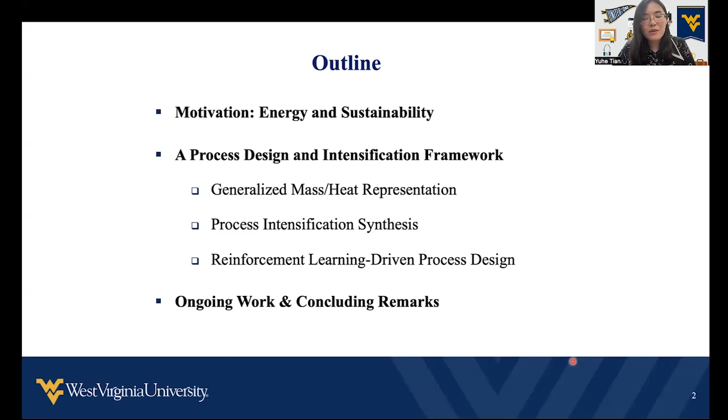Today, I will talk about the synthesis of sustainable process intensification systems. My presentation will be organized in the following way. I will start with the motivation to address the dual challenge of energy and sustainability. I will then introduce our process design and intensification framework, featuring generalized mass heat representation and also synthesis driven by mathematical optimization and more recently through reinforcement learning.

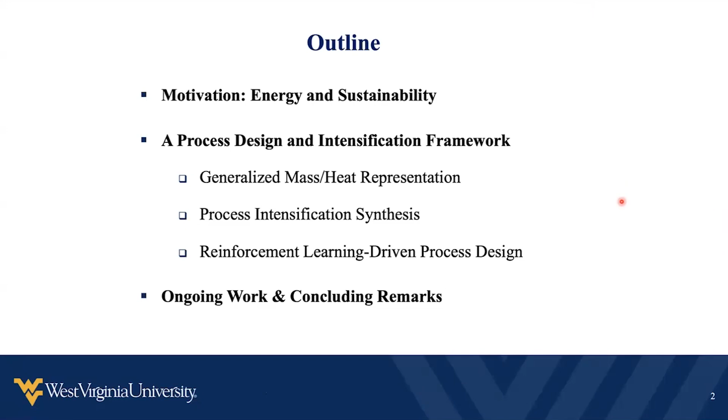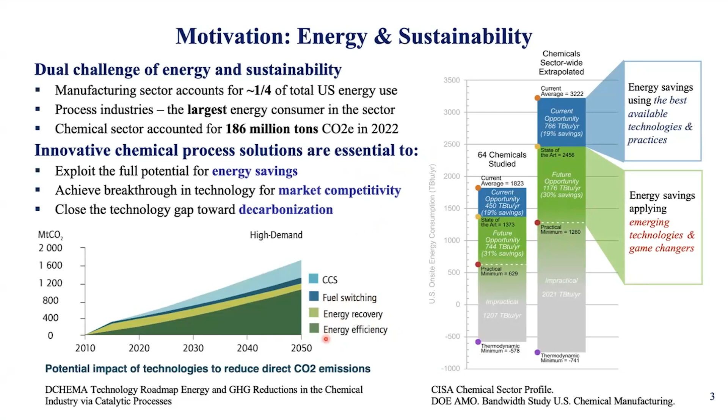To start, as we know, the chemical processing industry is the largest energy consumer in the manufacturing sector. It also accounts for a majority of carbon emissions. As per the DOE bandwidth study, if we implement the best available technologies in the current practice, around 19% of energy savings can be achieved. The development and deployment of emerging technologies or even game-changer techniques offers another 30% of energy savings toward the practical minimum of energy consumption. In this way, the innovation of chemical process solutions is really essential to exploit the full potential for energy savings and also to close the technology gap for energy efficiency towards decarbonization.

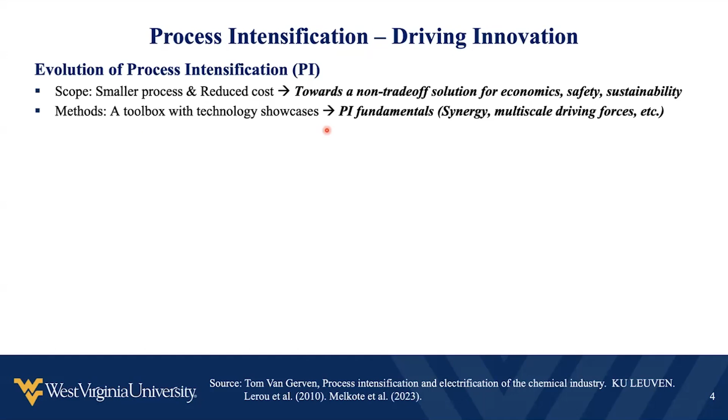Toward this direction, process intensification has been regarded as a promising class of technologies toward the non-trade-off solution from all the aspects of economics, safety, and sustainability. The concept of PI can date back to the 1980s, starting with the development of smaller processes with reduced cost. It has been traditionally regarded as a toolbox with certain technology showcases depending on experimental breakthroughs. However, recent years has witnessed the development of systematic theories on PI fundamentals, such as how to leverage multifunctional synergy, how to enhance multi-scale driving forces, etc.

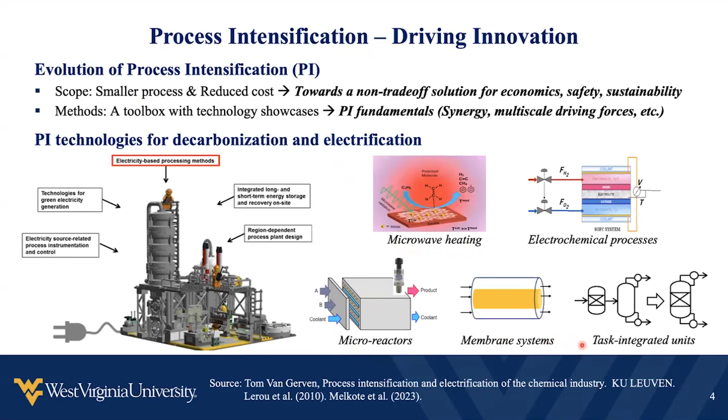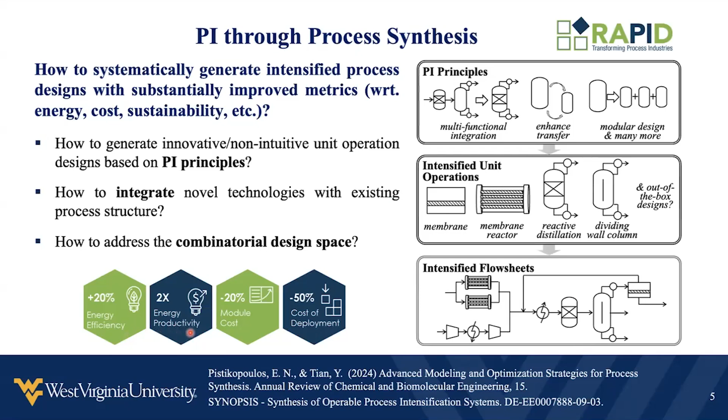Intensified technologies has also been playing a key role for decarbonization and electrification. It can either change the way that we are using energy, such as through microwave heating, electrochemical processes, or lead to the development of novel process units with step change efficiency, such as microreactors, membrane systems, task-integrated units, etc. A key question for computational research is how can we systematically generate intensified process designs based on these fundamental principles? And with the resulting modular or intensified unit operations, how can we integrate them with the existing process structure? And on top of that, how can we achieve substantially improved metrics, such as these defined by the AIChE RAPID Institute, more than 20% improvement on energy efficiency, double energy productivity, etc.

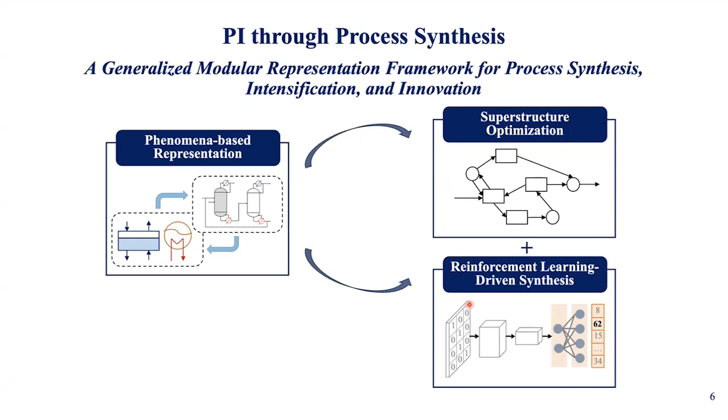To address some of these challenges, we have been developing a generalized modular representation framework for process synthesis, intensification, and innovation. The framework is built on a novel phenomena-based perspective to capture process systems from a lower aggregated level, and using superstructure optimization and reinforcement learning to systematically generate unit operation and flowsheet designs. In this framework, we also explore a little bit the lack of mechanistic model, which is very true for many emerging process systems such as microwave heating. So how can we use experimental data to incorporate these techniques into systems level integration and analysis as soon as possible?

In the following of this presentation, we'll be zooming into each component one by one, and let's start with the phenomena-based representation.

As we know, conventional process synthesis uses unit operations as the elementary building blocks for superstructure representation, and mathematical optimization will identify the optimal selection of these unit operations and also their flowsheet interactions. However, the pre-postulation of which unit operations should be included may sometimes hinder the discovery of non-intuitive or innovative process design solutions. On the other hand, unit operations can be regarded as an aggregation of more fundamental phenomena building blocks, such as reaction, separation, cooling, heating, mixing, splitting, etc. Using these phenomena building blocks to represent the process superstructure may open up the opportunity to identify novel process solutions, including the reinvention of conventional unit operations.

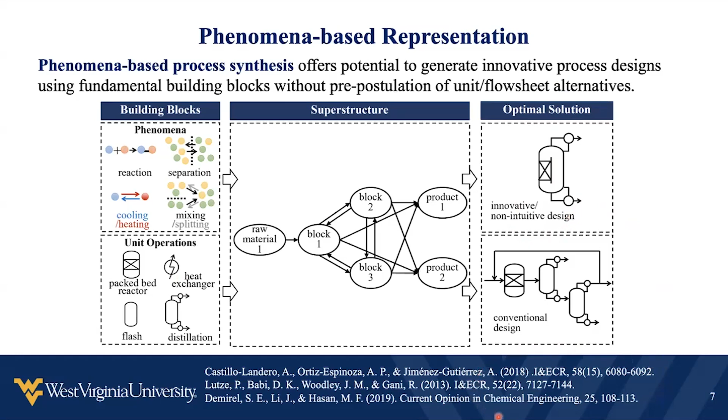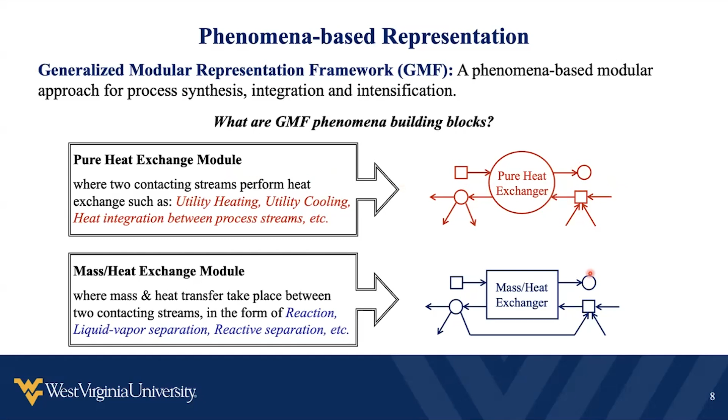Motivated by this, phenomena-based process synthesis has received increasing interest from the community, with some of the pioneering work listed here. Our solution towards phenomena-based synthesis is through the Generalized Modular Representation Framework. GMF utilizes two types of phenomena building blocks: a pure heat exchange module, where the two contacting streams can perform heat exchange, such as heating, cooling, or heat integration, and another mass heat exchange module, where the streams can perform reaction, separation, reactive separation, etc.

The representation hierarchy of GMF thus starts from the compact building blocks. From each building block, diverse process tasks can be identified, and the connection of these process tasks can lead to different unit operation or flowsheet designs. So the key question is lying here.

How can we identify different tasks from the same unified phenomena building block? And what is the key advantage for such compact building block representation? And what are the underlying model formulations to enable this systematic identification?

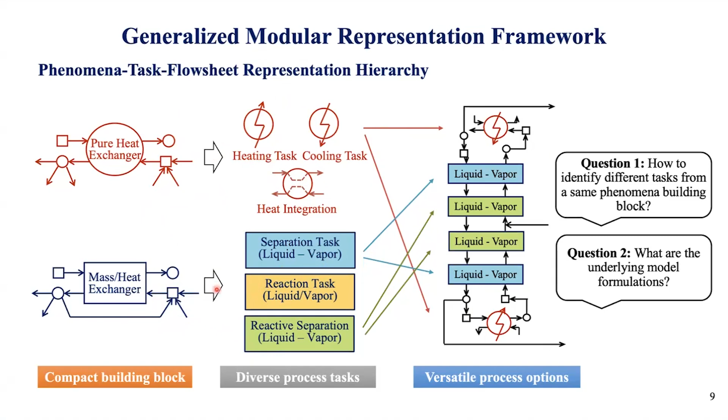Using the mass heat exchange module as an example, our solution is the Gibbs-free energy-based formulation for the driving force constraint. Let's use the example of a liquid vapor system, which may be included in a distillation system.

The starting point of the driving force constraint is the decreasing of the total Gibbs-free energy based on the second law of thermodynamics. To mimic this decreasing trend, please note that we don't enforce any equilibrium, only the decreasing of the Gibbs-free energy.

We use two terms to mimic the decreasing trend as a function of the process variables. The first term, G1, is a function of the change in molar amount in the inlet and outlet streams, and the second term, G2, is the derivative term of the partial total Gibbs-free energy versus the partial molar amount.

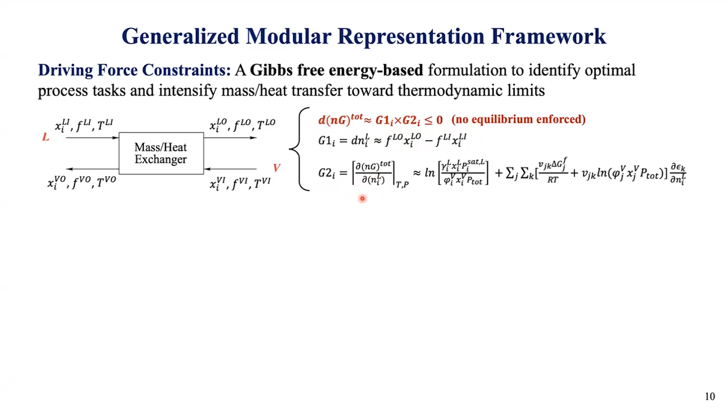What is surprising is that the further expansion of this G2 term comprises two parts. The first part, in the form of the separation constant, is dictating the existence and also the extent of the separation task. The second part is concerning the reaction as a function of the reaction extent.

With this observation, we use auxiliary binary or 0-1 variables to denote the existence or not of the separation task, reaction task, or if they both exist, leading to an intensified reactive separation task.

The key advantage offered by the driving force constraint is to let the mechanism of first principles determine the synergy or not between these multifunctional phenomena such as separation and reaction, and also it contributes to intensifying the mass transfer toward the thermodynamic limits.

At the same time, the representation of the mass heat exchange module remains compact and aggregate for physical representation, and also greatly contributes to keeping a tractable computational load.

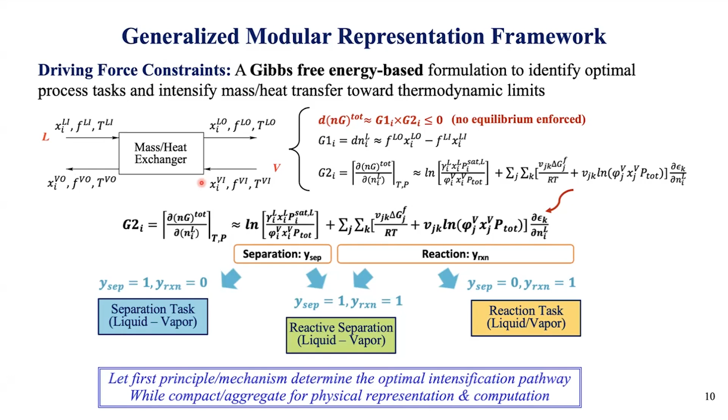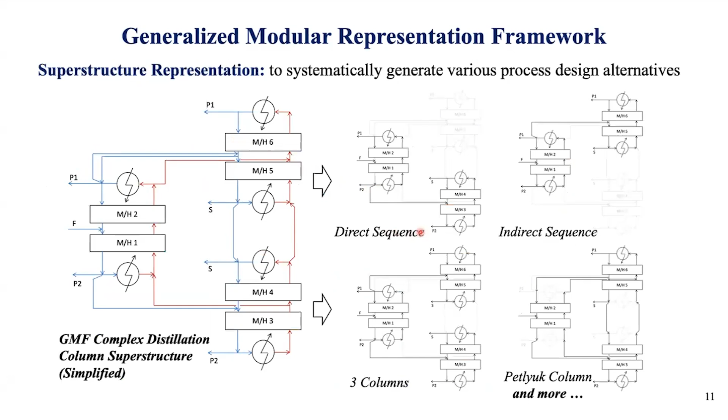With the representation of each phenomena building block, we then formulate a superstructure representation from which different process alternatives from the structural point of view can be generated.

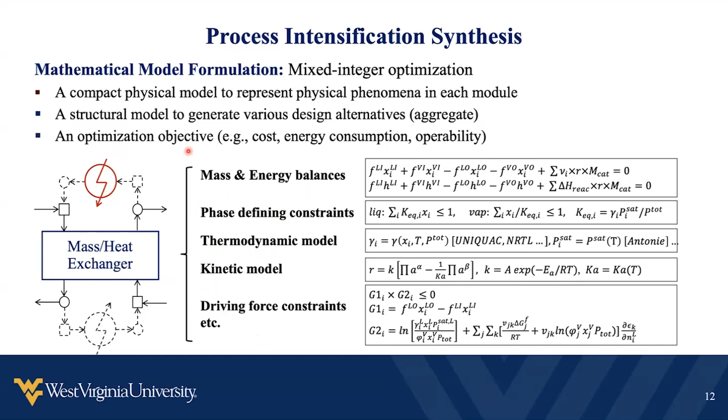The GMF synthesis model is formulated as a mixed-integer nonlinear optimization problem, including the compact physical model, mass-energy balances, phase defining, thermodynamic, kinetic, driving force constraint, etc., to represent the physical phenomena taking place in each of the modules, and then a structural model to generate different design alternatives in an aggregated manner. And on top, an optimization objective, which can be defined against cost, energy consumption, operability, etc.

With the basics of GMF, let's look at how it works to generate different types of intensified systems. We will first look at the combined reaction separation systems, which is a classical application for process intensification. Here, we use olefin metathesis as a representative example to produce butene and hexene from pentene.

Here, we integrate the use of GMF with attainable region theory. We would like not only to identify what is the optimal process design solution, but also how good is the resulting intensified design against these ultimate performance limits set by attainable region.

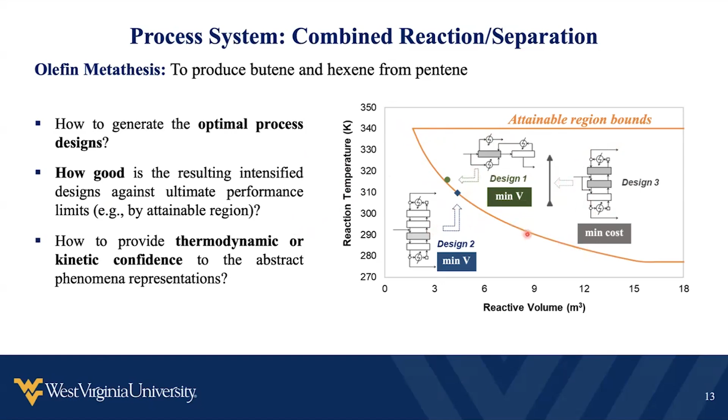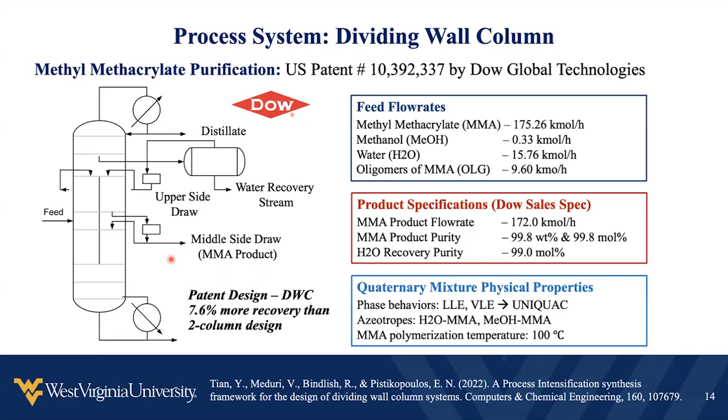We have also performed a collaborative case study with Dow Chemical Company for MMA, methyl methacrylate, purification. In the patent design by Dow Global Technologies, a dividing wall column configuration was proposed, which featured around 7.6% more recovery of the MMA compared to the conventional two column in sequence design.

Using GMF for grassroots design for this MMA purification example, we start with the GMF superstructure representation with the heat and mass heat exchange modules and identify the optimal GMF design solution.

These modular representations will be further validated with unit operation-based design and simulations such as Aspen Plus. GMF has been successful in identifying new precise design solutions featuring the structure of a dividing wall column, decanter, and also a flash column, featuring around 30% utility usage reduction and also around 50% equipment size reduction compared to the state-of-the-art patent design.

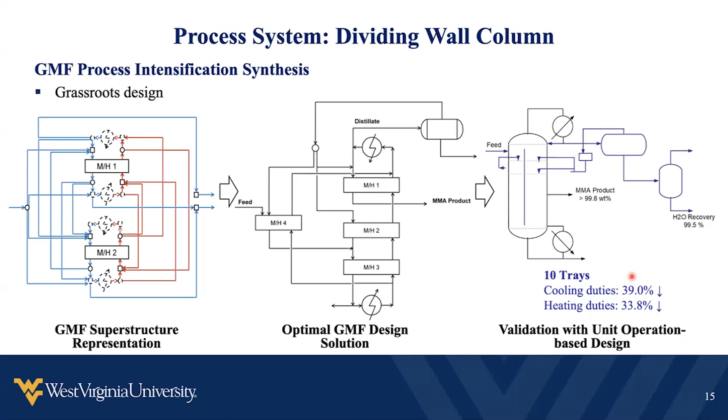We have also applied GMF for retrofit design and also for the synthesis of conventional design solutions to benchmark.

In addition to distillation-based systems, we have also looked into membrane-assisted reaction systems. The first question here is how can we capture the role of membrane?

The answer to this is particularly benefited from the unified Gibbs-free energy change-based driving force constraint, because the feasibility of the mass transfer through the membrane is also governed by the difference of chemical potentials.

Using the driving force constraint and the membrane feasibility constraint, we can systematically identify if there's synergy between membrane separation and reaction or not, thus leading to the identification of an intensified membrane-assisted reaction module or a conventional reaction module, again using the mass heat exchange module as the basic phenomena building block.

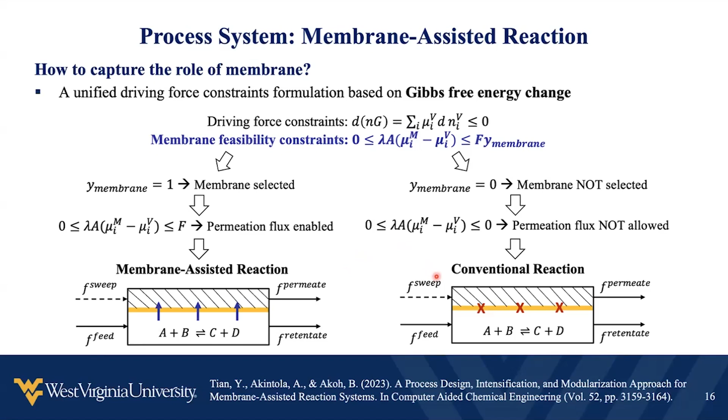To further capture the distributed process systems such as membrane reactor systems, we have proposed the GMF with coupled orthogonal collocation on finite elements.

A key advantage of GMF OCFE is only introducing continuous variables to improve the intra-modeling of the GMF mass heat exchange module, without further increasing the combinatorial or 0-1 mixed integer variables, which would be challenging for the superstructure optimization.

Here we have compared the GMF OCFE representation versus the modules-in-series type of representation mimicking the compartment models, and we have shown the superior modeling performance of the GMF OCFE.

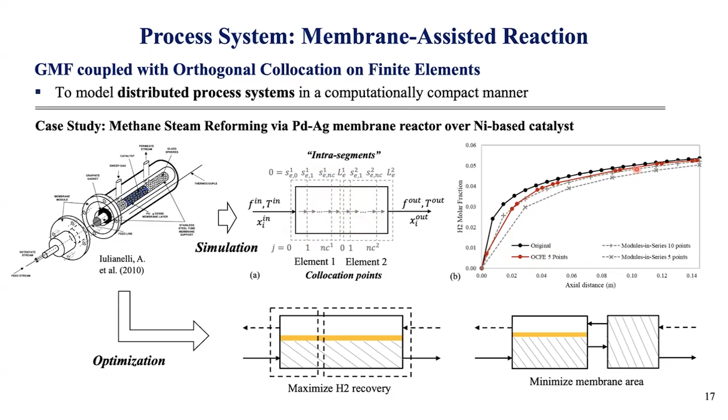We have also investigated the micro-reaction systems, which is the very beginning of the intensification technologies. To capture the role of miniaturization, we ask what is dictating the choice of a conventional larger-scale reaction versus a micro-reaction system. We propose the use of the second Damkohler number, which dictates the relative importance of the reaction rate versus the diffusive mass transfer.

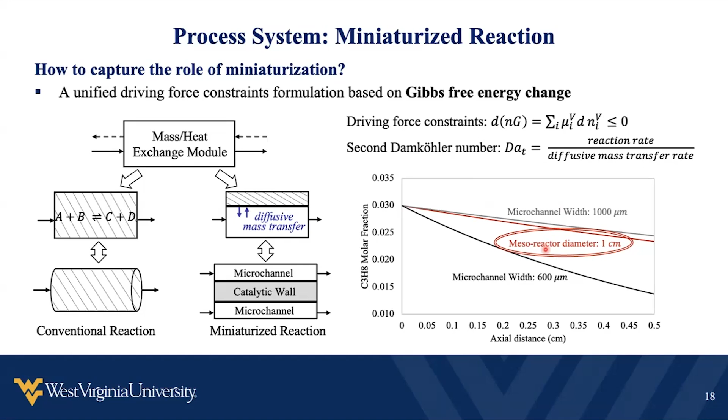The latter becomes significantly more important when the reactor scale is miniaturized. Preliminary results have shown that there may exist boundary conditions below which the micro-channel type of miniaturized reactors may overperform, and above which the micro-channel reactors may perform less well than the mesoscale or conventional scale reactors. The key here is how can we make a systematic decision on the choice of scaling up versus scaling down.

In the previous presentation, we talked about the synthesis and representation capability of different types of modular or intensified systems. Another note we would like to make here is about the integration of design and operability. A key question for intensified systems is that the integration of multiple tasks may reduce the degree of freedom and reduce the operating window of the resulting unit operations. So how can we synthesize optimal intensified designs while also guaranteeing a desired level of operability?

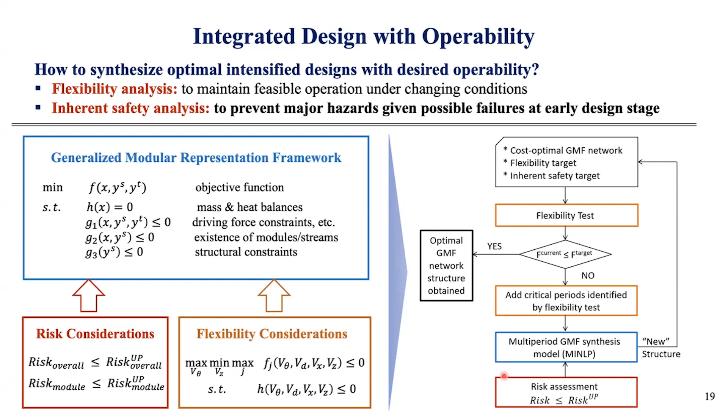In our previous work, we have incorporated flexibility analysis and risk considerations with GMF, which results in an iterative framework to generate optimal GMF designs, but also with desired operability.

An illustrative case study on MTBE production: here we can see that if we implement cost-driven objective functions, we will identify a single column type of structure with 5 mass heat exchange modules.

If we add a further constraint to accommodate uncertainty and increase the feasible operating range by around 10%, while simultaneously reducing the overall process risk for inherent safety considerations, the optimal design will lead to an increased number of modules compared to the cost-optimal one.

If we push further for safety considerations, we observe optimal designs with a side column type of structure. In other words, the inclusion of more degrees of freedom contributes to the enhancement of operability, and of course the price paid is in the cost objective function.

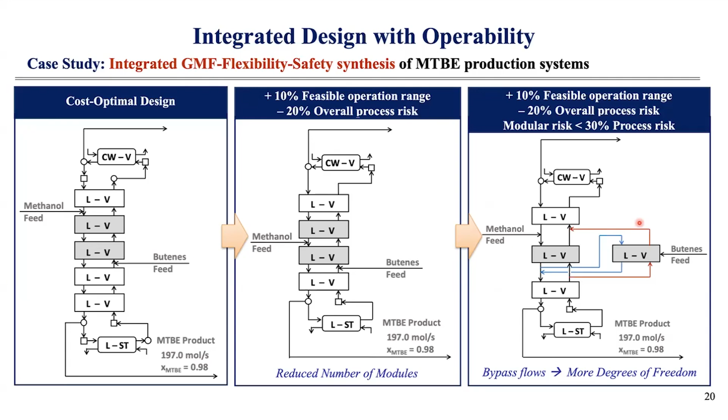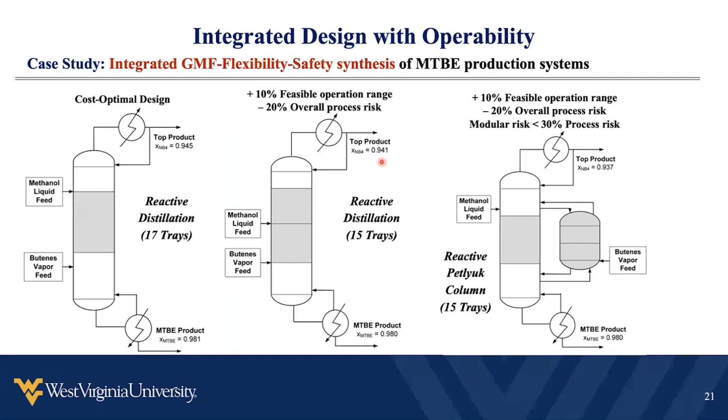For the identification with the corresponding unit operations, we can identify the different corresponding design structures. The key message here is that the incorporation of operability considerations, even at the phenomena design stage, may lead to the discovery of different design structures with notable operational or structural changes.

For more information, we would like to invite you to look into our framework development for the synthesis of operable process intensification systems, which can be referred to in our published work.

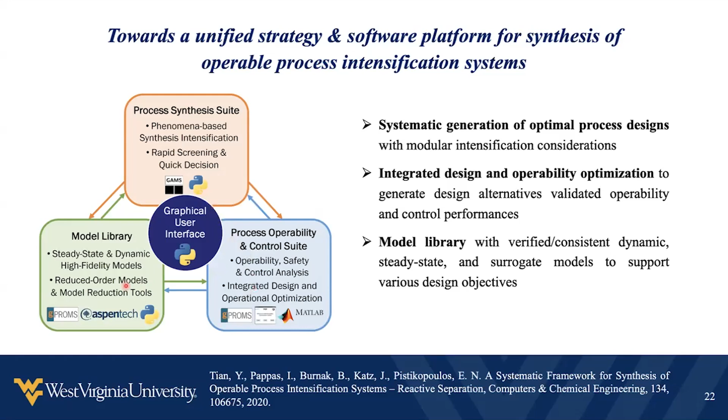In addition to the process synthesis representation and the integration of design operability optimization, the synthesis software platform also features a model library with verified dynamic, steady state, and surrogate models to support different design or operational analysis objectives.

In the previous part of the presentation, we discussed how to leverage phenomena-based representation with superstructure optimization to identify novel intensified design solutions. However, as can be noted, GMF and many general process synthesis problems may lead to large-scale, highly nonlinear, and non-convex optimization problems.

So how can emerging machine learning techniques help us improve the efficiency of synthesis solutions and intelligently generate process designs? In collaboration with Keylogic and PNNL, we have developed an RL-driven process synthesis strategy. More information is included in our FOCAPD conference paper through Systems and Control Transactions.

Herein, the goal is starting from a process unit pool, including the maximum available unit operations such as flash, mixer, reactor, heater, cooler, etc., without any superstructure pre-calculation, using the RL algorithm to identify feasible design solutions and ideally the optimal design solution. I would attribute all the efforts and contributions to my collaborators, and now just a very brief overview of the algorithm.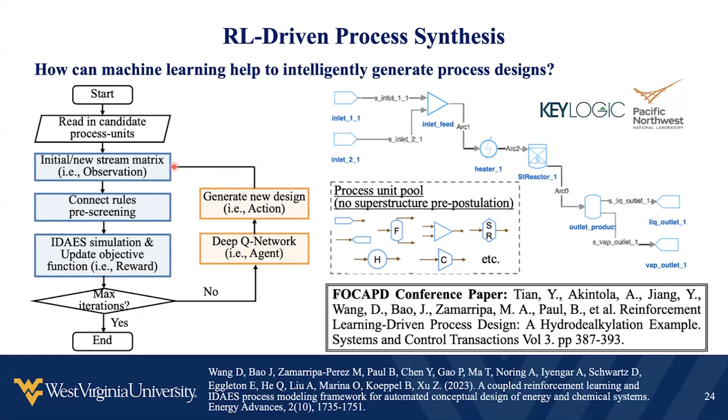The agent is designed using the DeepQ network, and it will determine the action to generate a new design, such as adding a new unit operation or changing the stream connection. The resulting new design flowsheet goes back to the loop until a maximum number of iterations is achieved. As a quick example for the HDA process design, here we show the list of the maximum available unit operations, and the RL algorithm can use any type or number of these up to the maximum available. Different process design alternatives can be generated, and we can benchmark them against different metrics such as productivity, revenue, etc.

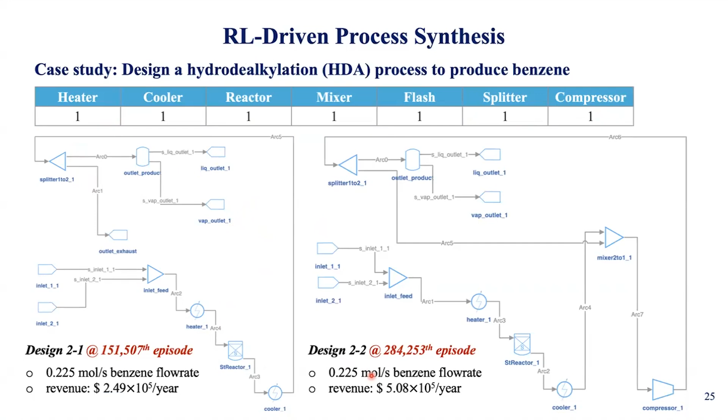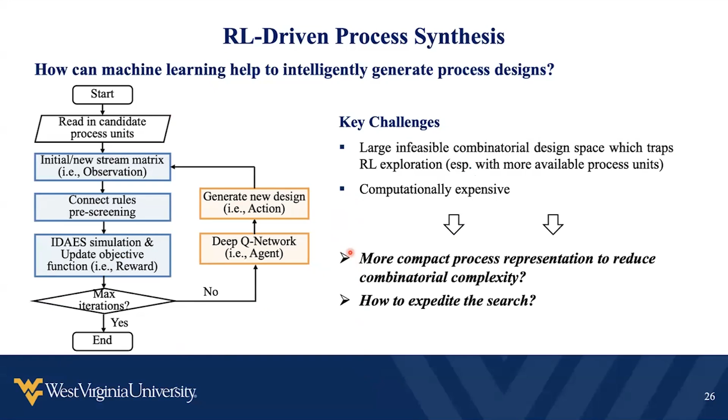Some challenges we have observed with RL-driven design is that because there is no pre-postulation of the superstructure, we have observed a large combinatorial design space, which makes the RL algorithm very computationally expensive. However, this has also created a natural link with the more compact process representation via GMF, which we are currently developing toward RL-driven GMF synthesis, where we use heat and mass exchange representations to generate process designs driven by the RL agent. We are also collaborating with Cornell University to implement quantum RL to expand the design space search.

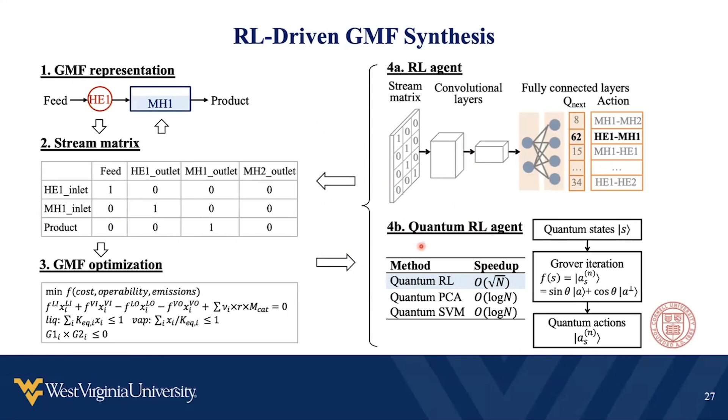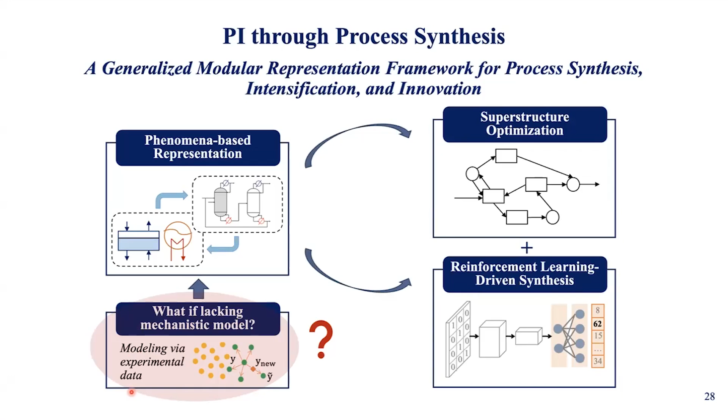In the last part of this presentation, we would like to briefly explore the scenario where the mechanistic model is still at a very early stage of development, and how we can incorporate systems analysis for these emerging technologies just with experimental data. To justify the need for this, we use the example of microwave-assisted ammonia synthesis.

The microwave reactor presents a promising alternative to the classic Haber-Bosch process, which operates at high temperature and high pressure. Due to the advantageous feature of microwave heating, which can selectively heat up the catalyst, proof-of-concept experimental studies have shown that microwave-assisted ammonia synthesis can be operated at lower pressure and lower temperature. However, due to the multi-phase gas-solid, multi-scale nature from the catalyst particle to the reactor box scale, and also the multi-physics, especially the electromagnetic mechanism presented in the microwave reactor, the model development of these systems is still at a very early stage.

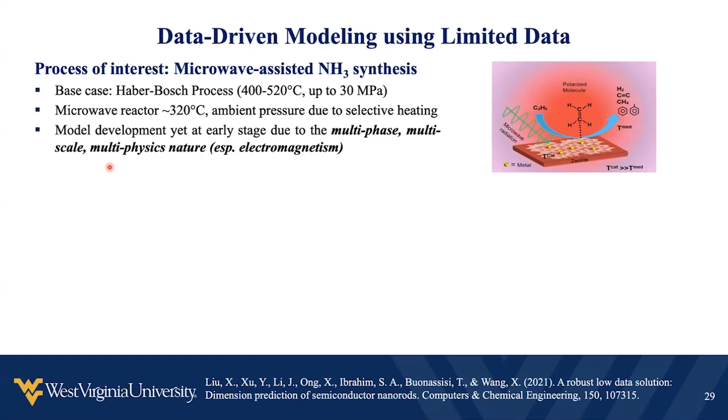Our research work has developed a SMOTE-integrated neural network based on a limited number of experimental data, around 50 data points, which were presented in the FOCAPD conference poster. We apply synthetic minority oversampling technique to generate more synthetic data to bridge the gap between the limited amount of experimental data and the large amount of data needed for machine learning analysis. We then use a simple neural network, which is enough to generate a black box data-driven model for this microwave-assisted ammonia process. Here is the comparison between the machine learning predictions versus the experimental data points.

We would like to highlight here that it is important not only to validate the prediction accuracy for the discrete data points, but also to attach importance to the continuous trend prediction, which is very important for the next step of optimization.

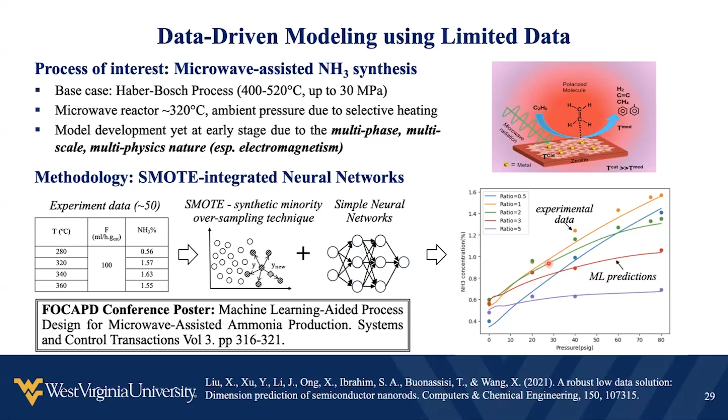To conclude, in this presentation we have discussed two types of representation approaches. To recap: the generalized modular representation to capture chemical processes using mass and heat transfer modules, and also how to include emerging process technologies just based on tens of experimental data points. We have also discussed solution strategies using mathematical programming and more recent developments in reinforcement learning algorithms. The key is to evaluate different design alternatives in a unified modeling framework and use state-of-the-art optimization and machine learning strategies to drive the synthesis and discovery of novel process design solutions.

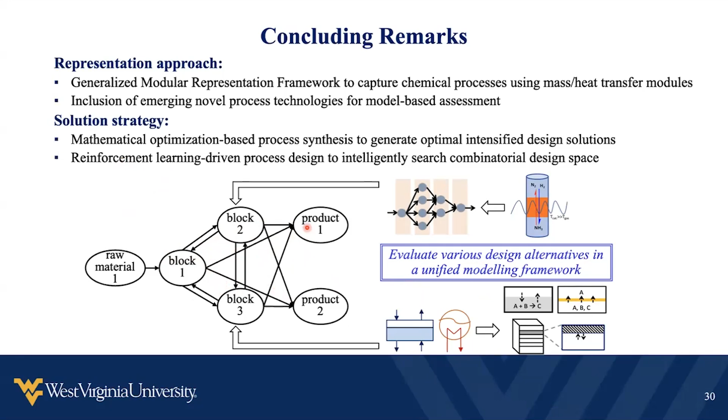For more information, we would like to invite you to check out our book, co-authored with Professor Pistikopoulos at Texas A&M University throughout my doctoral program. Here we discuss a survey of recent PSE advances in process intensification systems, and present the entire process intensification, synthesis, and operability framework with step-by-step guidance and demonstration on case studies, as well as our synopsis software prototype.